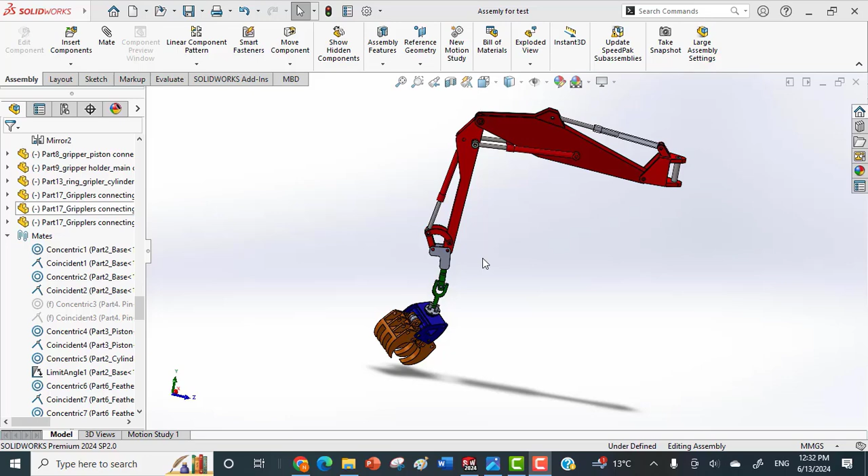Hello everyone. In this video, I'm going to talk about the crane or log lifting, timber log lift or timber crane. So I have designed this crane here, and I thought maybe it is a good idea to optimize the design, the crane that I already have designed, but we can just optimize that or improve its functionality or efficiency.

So you can see here I have designed a new gripper, because in most cases I have seen that all of these cranes are equipped with a gripper that has two couples of piston and cylinder. Let me show you here.

So these are, for example, the typical cranes. This one is mounted on a trailer. However, this one here is mounted on a self-propelled machine, a hydrostatic machine, self-propelled. So you can see here it is a very large crane, has a gripper.

In so many cases I've seen that they are using just two pistons and cylinders to make these jaws to be opened and closed.

And here you can see the schematic figure of this crane. This is the trailer, then the crane, piston and cylinder, and here is the telescopic piston and cylinder. So this is the gripper, and this system is used for making this gripper rotate around this axis.

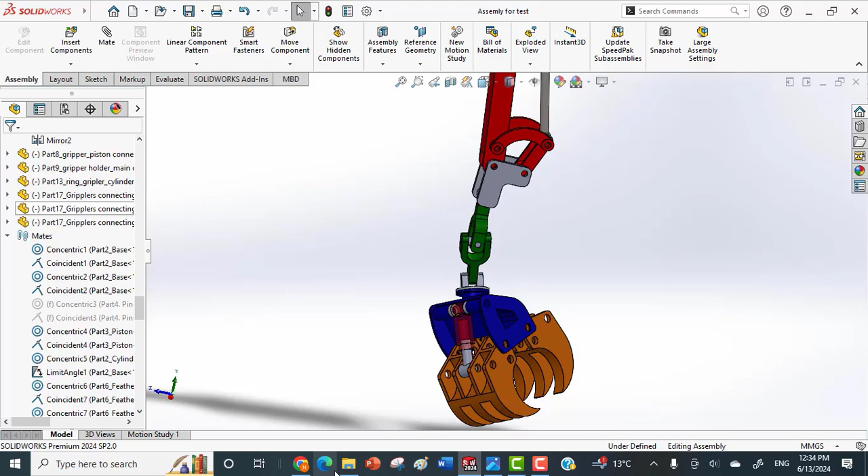Let me show the universal joint here. This is the universal joint, and this one is for what? For the gripper. All of the components of the gripper, you can see here.

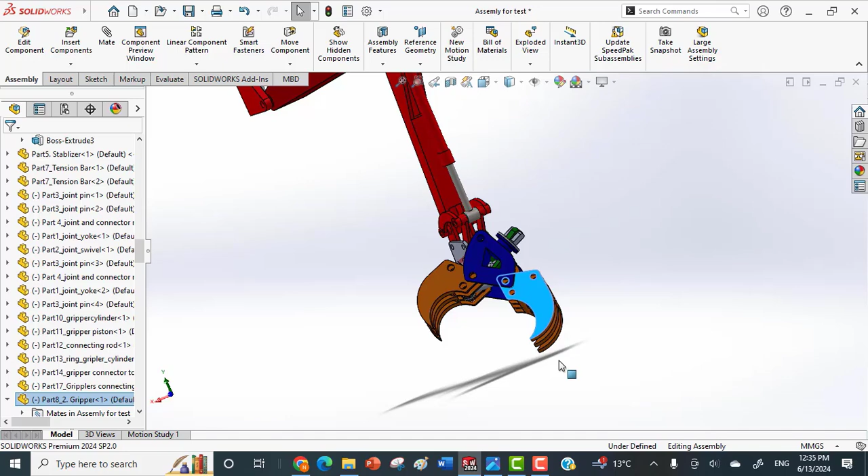But in this video, I'm not going to talk about each of these components or draw them from scratch, but I'm going to show you how I assemble these components together, because assembling all of these moving parts, for example here and here, even here, all of these jaws - let me first make this one come down. Let me fix this one here, for example. You can see here the jaws opening and closing.

But the problem here in assembly is that these components are not so easy like that, because we have to do some prevention to avoid overlapping. And I'm going to talk about this technique named angle and linear mate technique that I'm going to use in order to avoid this overlapping.

Let me show. I have done two linear or distance and angular limits here. You see this distance - what is this distance? Distance means the distance that the piston goes inside the cylinder, and angular means this angle between this one and this one, the chassis and the jaw, the right jaw.

So if I am going to suppress them, look at what happens here. You see what happens? They overlap each other.

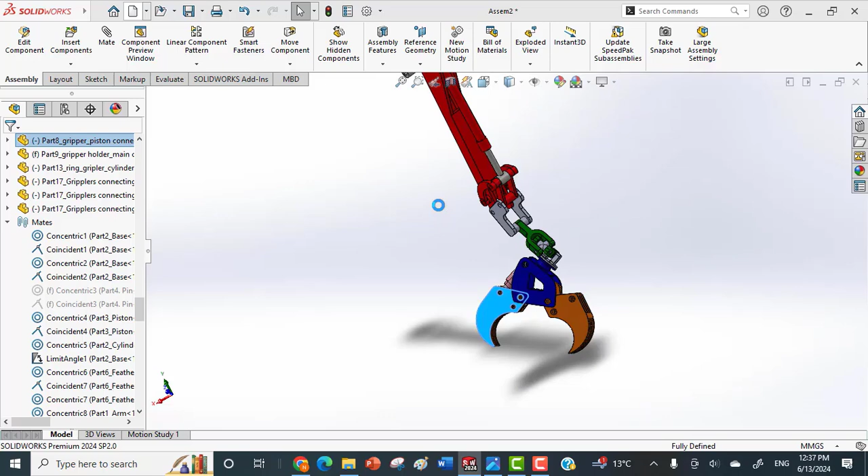So let me bring a new one, and a new assembly here. In this stage, I will have to bring all of these parts together - not all of them, but the base and the feather here. Where is the feather? This is the feather and the arm. I brought all of them one by one.

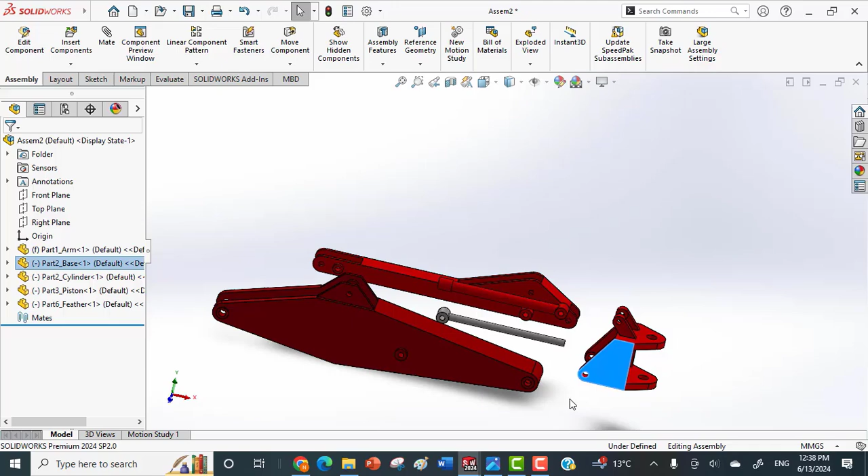Let me do this one first. Made this one with the feather with the base, and here with here. And secondly, I have to take this one here with here, and let me do this.

And here, making coincident. At the same time, making the cylinder and the piston concentric. So what is next? The next one, making this one concentric with here, and that's it.

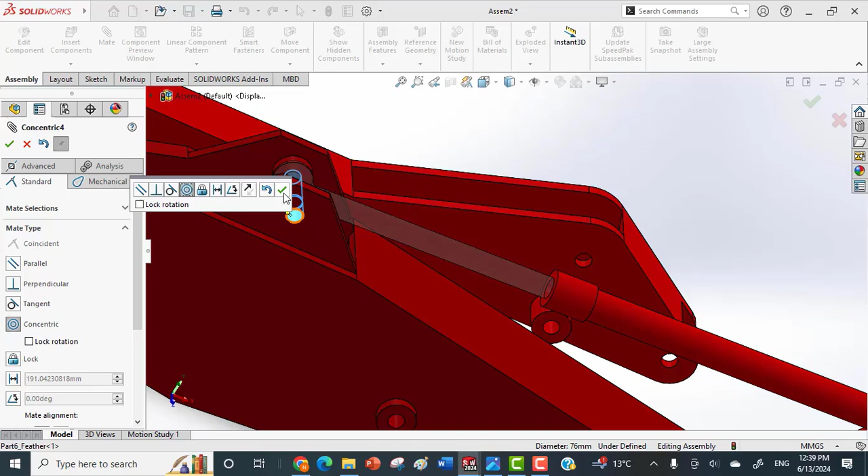So let me show what is going on here. Let me first fix this one. Okay, I fixed it. You see, but there is a problem: the feather is rotating, the angular rotation of the feather is 360 degrees. We don't need that. We just need something like this between this degree and this degree, because you can see we have considered this space here.

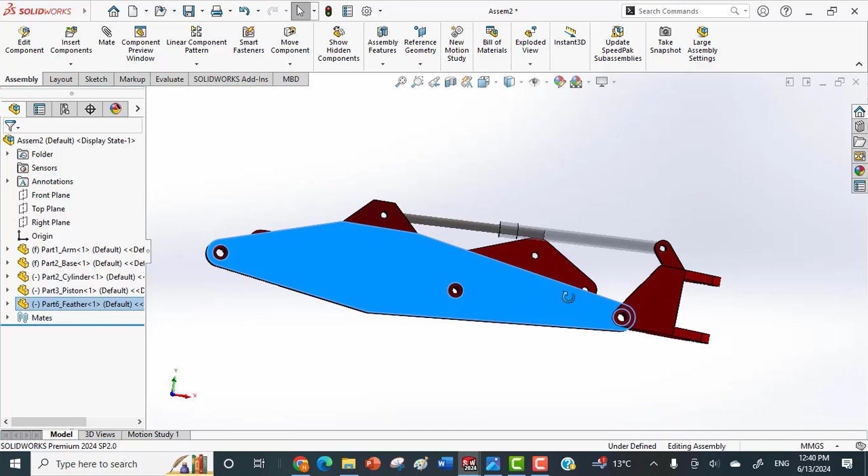We don't want this piston to go out of the cylinder here. So for mating and for limiting the angular rotation, we have to use this technique of limiting. It is very easy, or maybe you already know that, but I wanted to use that and show how it works.

This one, mating with here. Okay, so you see that... let me, okay.

Angular. Okay, flip, let me flip it. Okay, not flipping like this. Okay, if I'm going to make that, I have, okay.

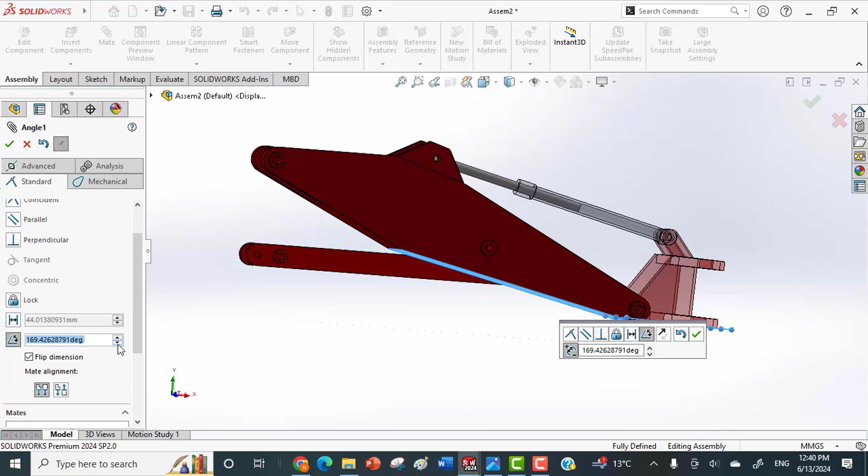So I can say if the minimum is 175, the maximum is 175, what will be my minimum? Let's do that 60.

60 is a lot. So let's do that 120. Okay, even 120 is a lot, because we don't want to make this one just vertical. It is close to vertical.

We can say that 100 is okay. 120, 140. Okay. Yes, the distance between 140 and...

175 will be even this one. We can make this one 145.

135. Okay, 135 is minimum. So I'm going to change standard to advanced. Minimum will be this one, and the maximum will be 175.

Okay, minimum 135 and maximum 175. Okay, here.

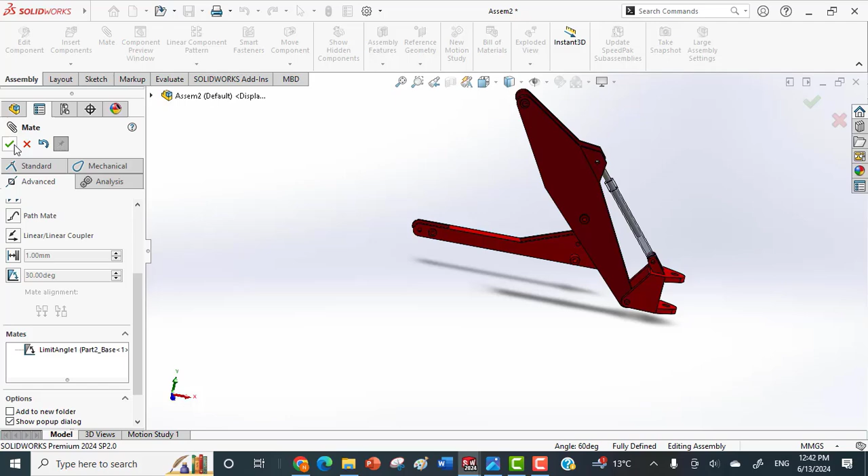So you can see here exactly. Okay, it's working. Let's bring the next stuff here.

The next component is the feather, the arm. How I'm going to do that? I'm going to do this one.

I think it's not float. Yeah, it should be float right now. Okay, let me bring it here.

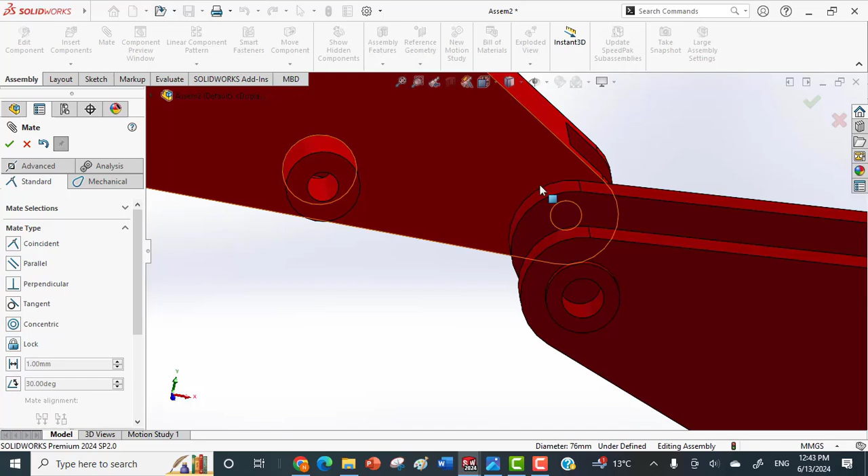Okay, okay, and okay, and this one, okay, and this one should be coincident with this face. Okay, that's it.

So let me bring the other components. Again, we are going to use the same piston and cylinder.

Piston and cylinder here. Okay, okay.

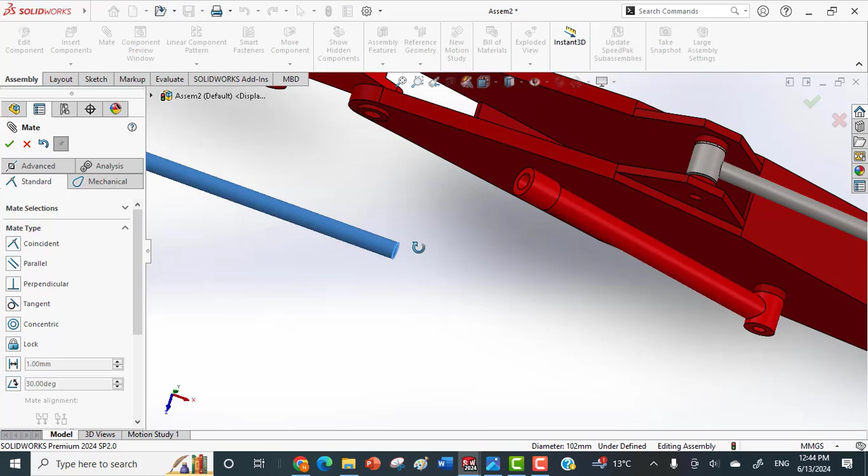This piston should be concentric with this cylinder as well. Okay, so it should be at the same time. It should be concentric with here. Okay.

Not here. Oh, it's not correct. It should be. Let me delete that one. Yes.

Sorry, here. So I have to make coincident and concentric with this one.

Okay. Okay. That's it. Perfect.

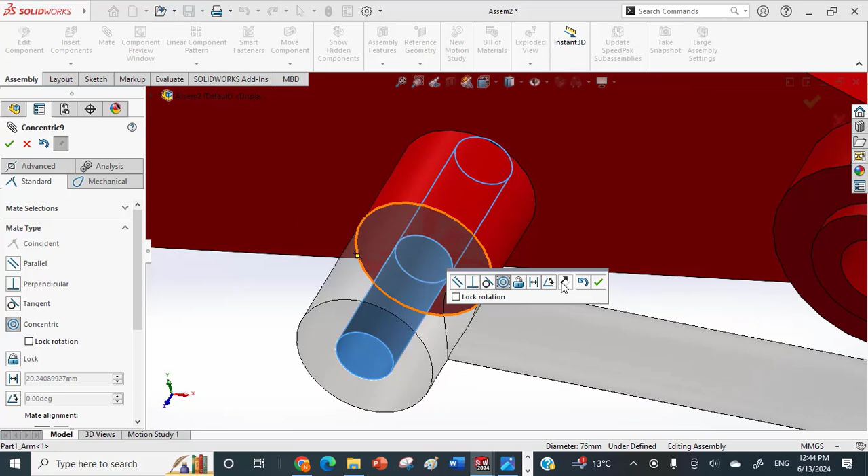So let me show what is going on here. Okay, let me bring the other side, a couple of piston and cylinder here.

So again, here and here, you can see that I'm going to bring them inside the assembly.

Section. Okay. Here, let me bring here and here.

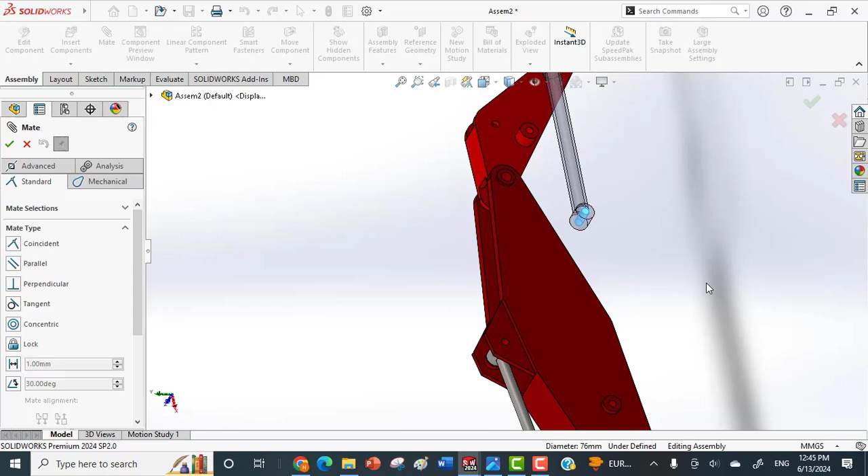So here, I have to take this one mated with the feather here. Okay.

And here with here. Yes, I think it will work. Hopefully. Yes. Okay.

Okay. The next one is to mate piston and cylinder. Okay, and mating...

What's going on here? Okay. Okay, mating this piston and cylinder here.

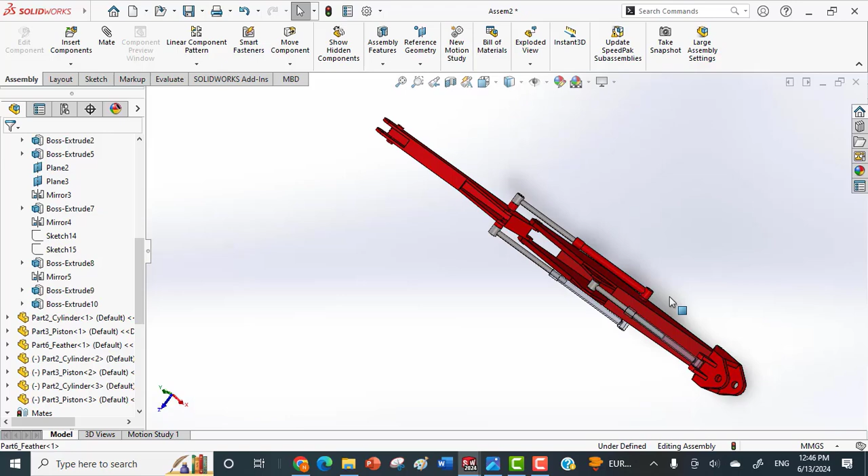Okay, and okay. So again, you can see here that we have overlapping between this component, the feather and the arm.

So again, here we have to do the same mating process here.

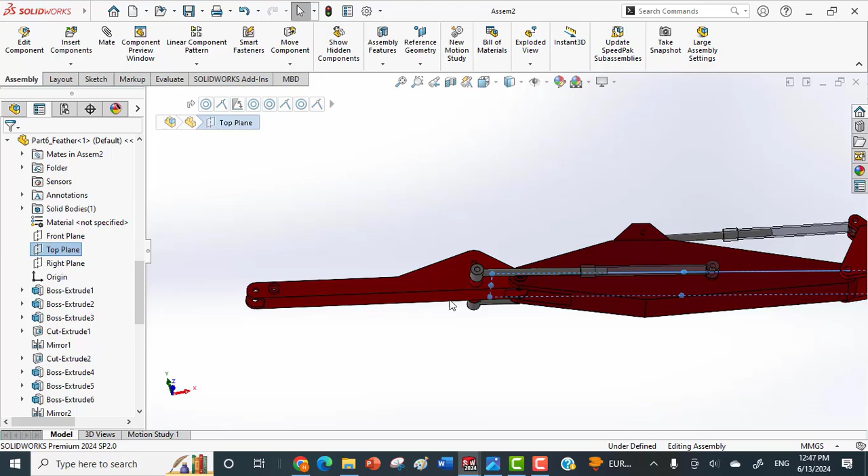Okay, the same process here. Let me find the component - not the front, not the right, the top plane - mating with here.

Okay, so if it is 2 degrees, how am I going to increase it? No, I have to increase that until, for example, 90.

90 is okay. Yes, I think 90 is okay. Even we can do that, 95.

Yes, 95. So you saw that 95 is the maximum and the minimum was 2, or 3, or 5. Let me make it... or 3.

Okay, 3. I changed the standard to advanced. Okay, so here, okay, so you can see here that it goes here and here.

Even let me fix this one, okay, to show you that perfectly. Okay, that's it.

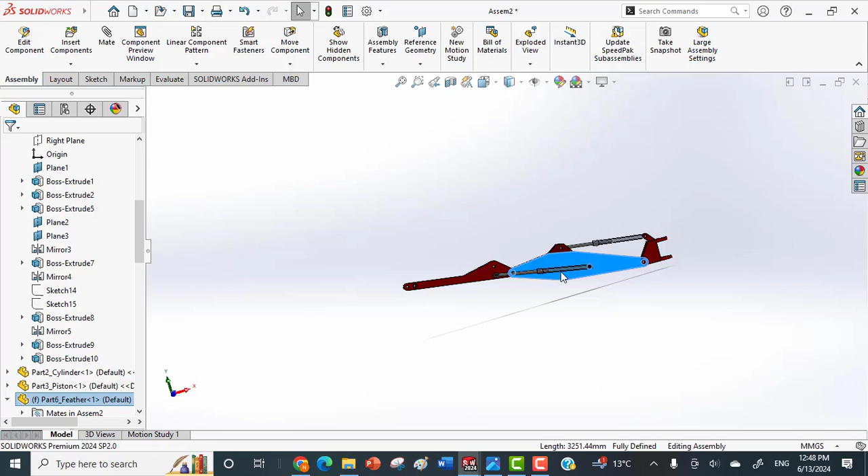Again, floating this one, and let me bring the next component here. The next component should be again the same piston and cylinder to connect...

To connect the arm to the joint, the universal joint here. Where is the cylinder here? I didn't bring that here.

Again here, cylinder. I'm going to bring this one as well, and the stabilizer, and this one.

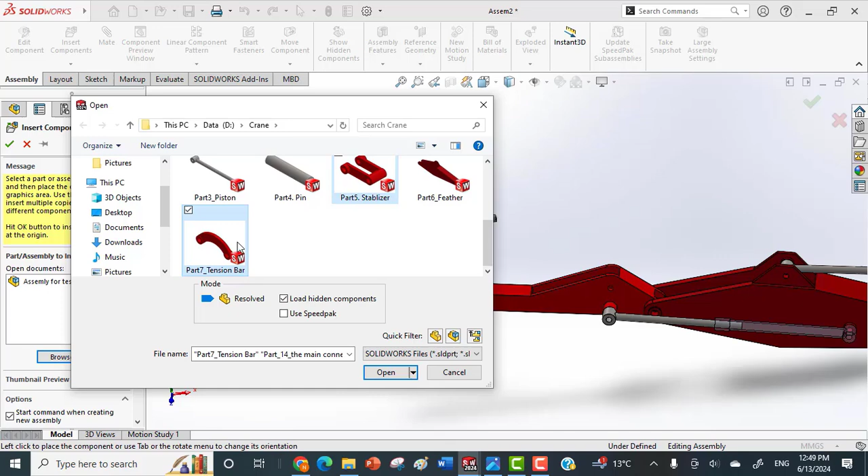Okay, the tension bar. Okay, and okay, okay, and okay. So, and okay. So let's do this one.

Okay. Okay, let me bring it up here.

Okay, this one, mating piston and cylinder again. Okay. Okay.

And this one should go here. Mating again this section with the surface.

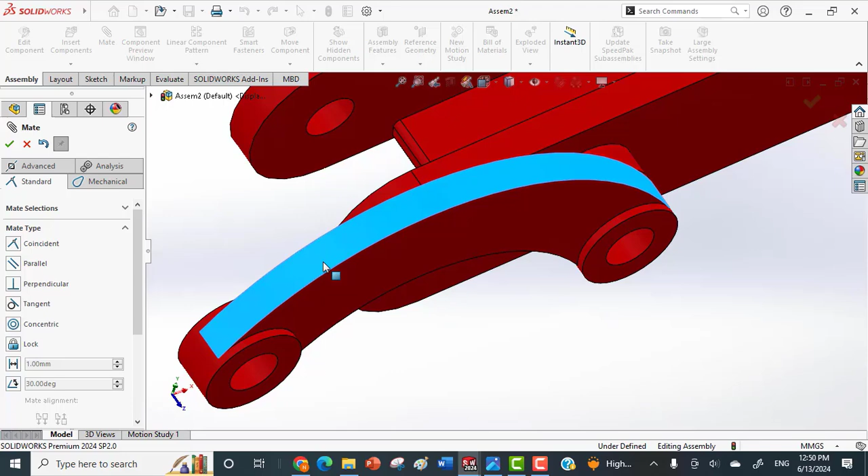Okay. Okay, and... for now, okay.

So here, let me do what? To fix this one firstly.

Okay, already fixed that. Okay, and okay. So here, I have to bring...

This one here. Okay, so here should go - I think, if I'm not wrong, it should be, yes - because it's going to make...

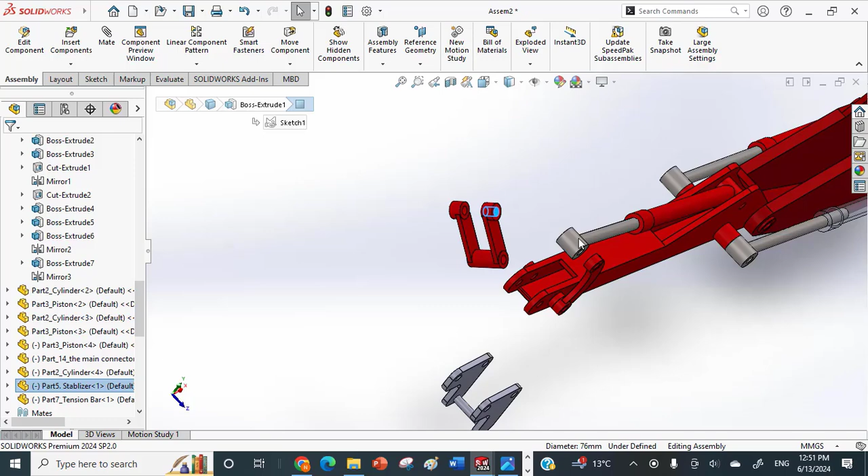That one rotate. Yeah, it should go here. Mating this one with this one, and this one.

And where is that? Yes, here, this one with here. Okay.

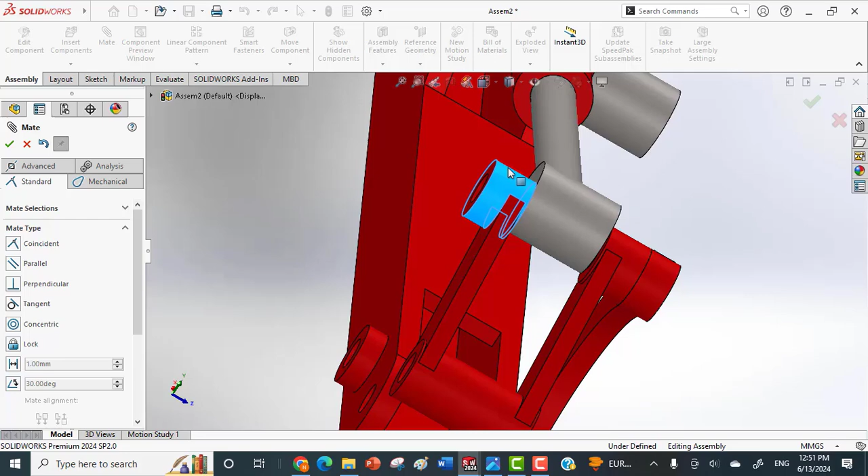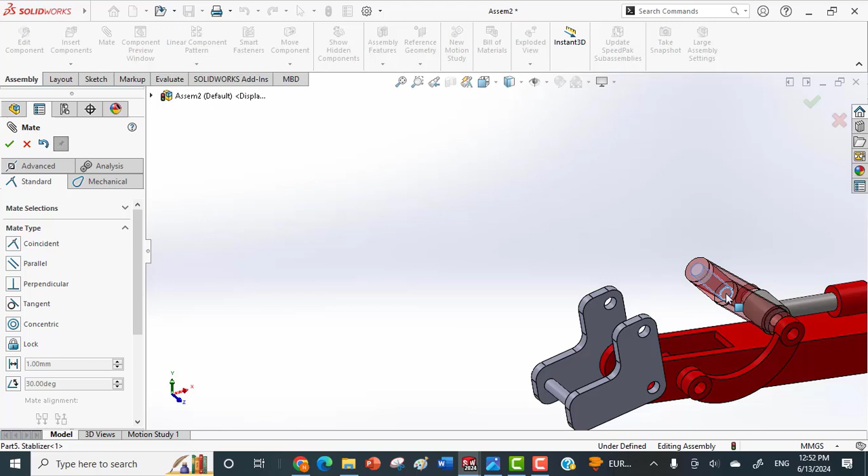And again this one here, and this one coincident with here. Okay, let me bring this one as well. Here, what am I supposed to do? Yes, this one goes firstly here to here, and this face with this face, obviously. So the next process should be mating this one with here. Okay, so yes, that's it.

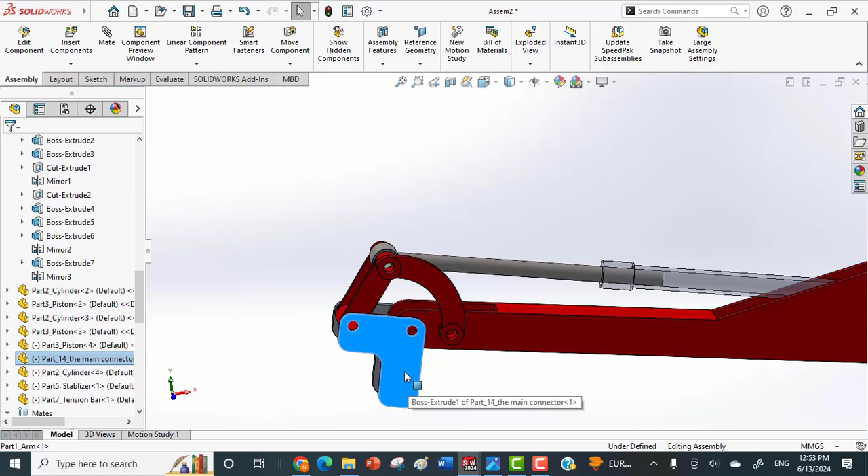So what is going on here? You can see again we have overlapping here. What am I supposed to do? I have to do again the same process of limiting the angular rotation here. So if I'm taking this one, let me firstly show what is going on inside here. Let me make the cylinder transparent, so you can see how the piston moves inside that cylinder. If it goes, for example, 90 degrees between this one and this one, it is enough.

And even if it comes back close here, even a little down, this will be okay. Because we still have space here inside the cylinder, between the head of the piston and the inside end of the cylinder. But let me do it like this - you see, it's not overlapping because there is a space here. No, it is obviously all overlapping, so I don't have to make this one here. I have to, at maximum, make it here.

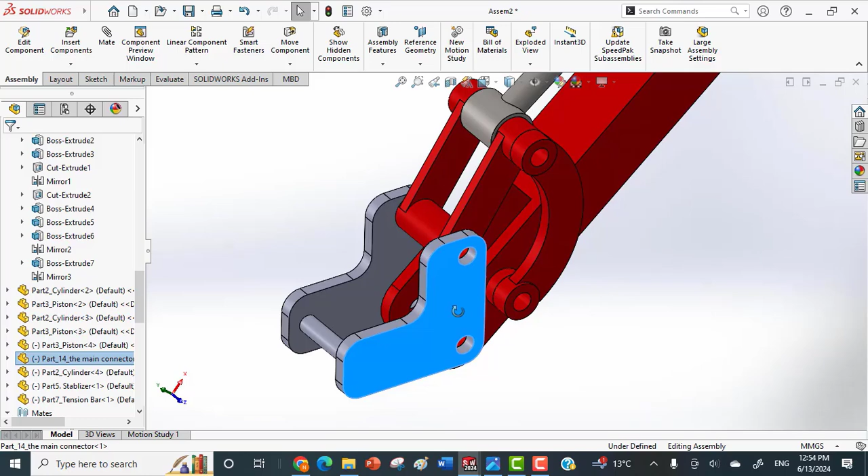So let me bring the other stuff as well, the left tension bar, not stabilizer, the tension bar here. Okay, we have to make this one to... okay, and okay.

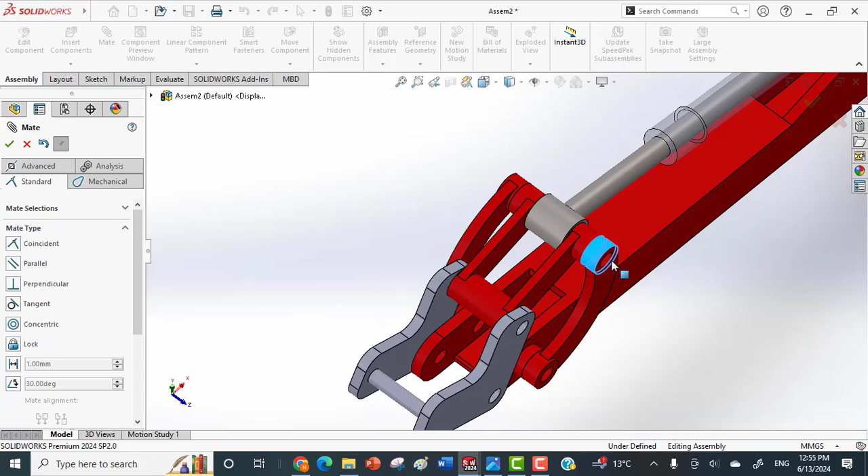Yes, I have to bring it until here and until here. Okay, this component here is okay. So this component, I have to bring it here, not the right, not the left, not the front, the top, mating with this surface here.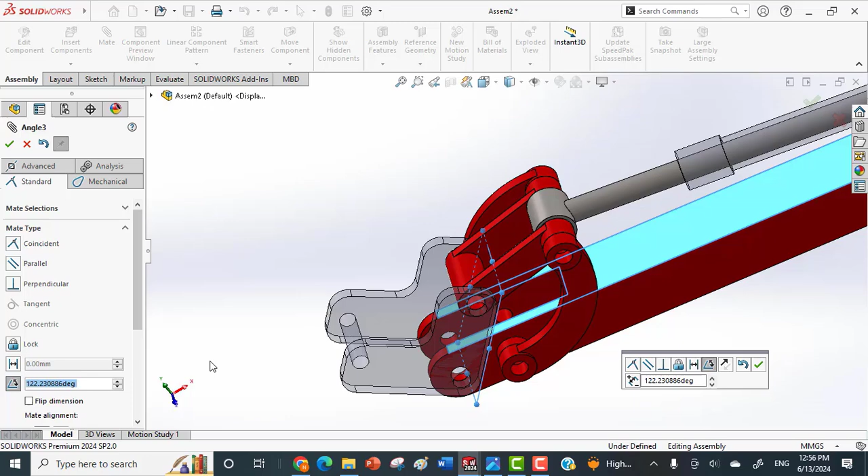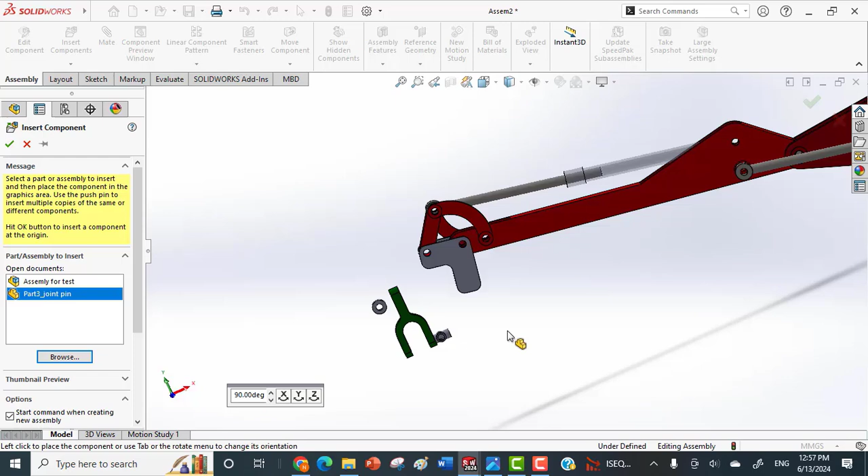So let me bring the universal joint component as well. Let me go inside this file, the yoke, the swivel, and pin, not joint - pin 2 and 3 and 4. Let me bring the second yoke and the other rings as well. Where is the second yoke? The same jaw will be the second yoke. Here, and again the pin. Okay, all of them again, 1 and 2 and 3. Okay, here.

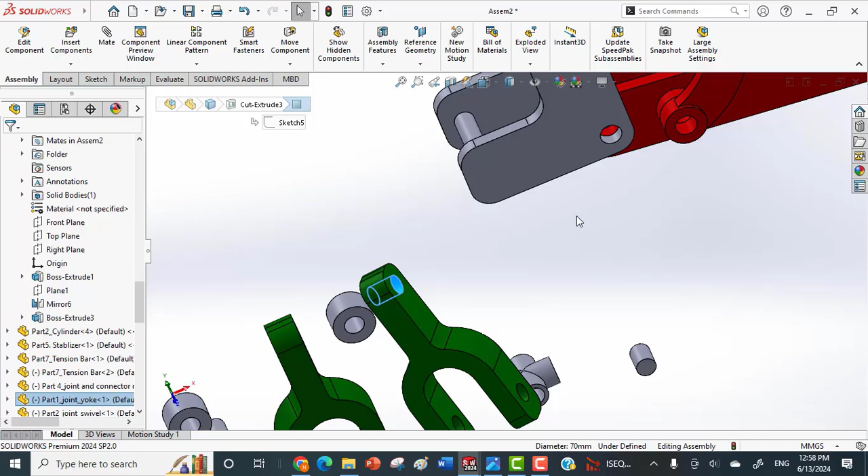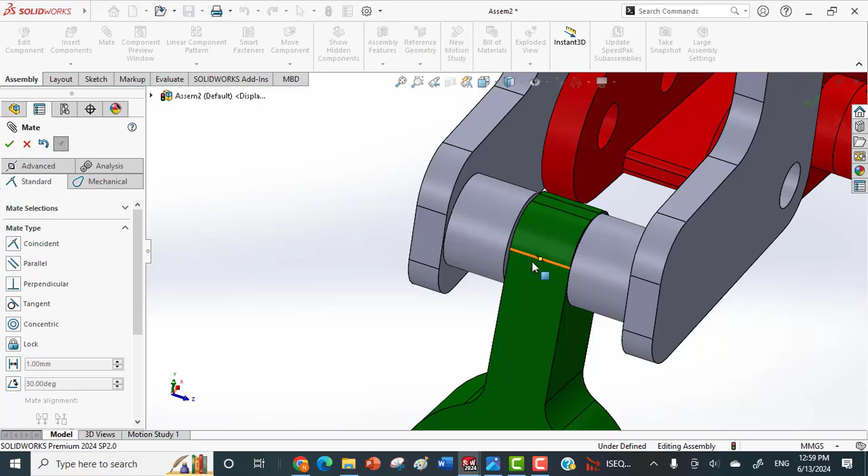This one should be mated with here. Okay, let me bring this one. Let me mate this one here, and make it coincident with this surface. And this one coincident with this ring as well. So the next, again the same ring - where is the same ring? This ring with here. Okay, and make coincident with this surface. Perfect, okay, so you can see here it's working like this.

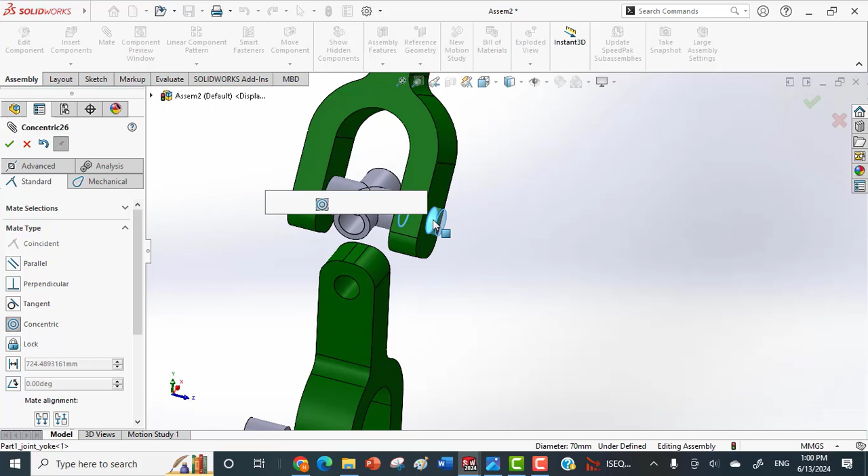Okay, let me bring this one with here, and this surface with here, and let me bring this one here, and make that coincident with the surface. Perfect. Okay, the next component, the next jaw should go - this one should be concentric with here, and this surface coincident with this surface. Okay, so again let me bring this one here and make coincident this surface. Perfect.

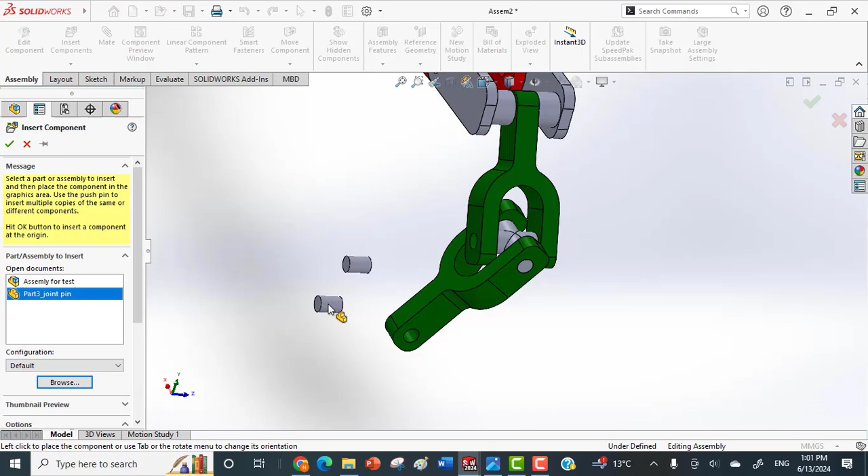Okay, so let me bring the other third and fourth pin here. The third one should - and again I have to bring that for the second time. Okay, so here let me mate this one with here. Okay, and here, that's it. And where is the last one? Okay, here you can see, here with here. Okay, okay, and okay.

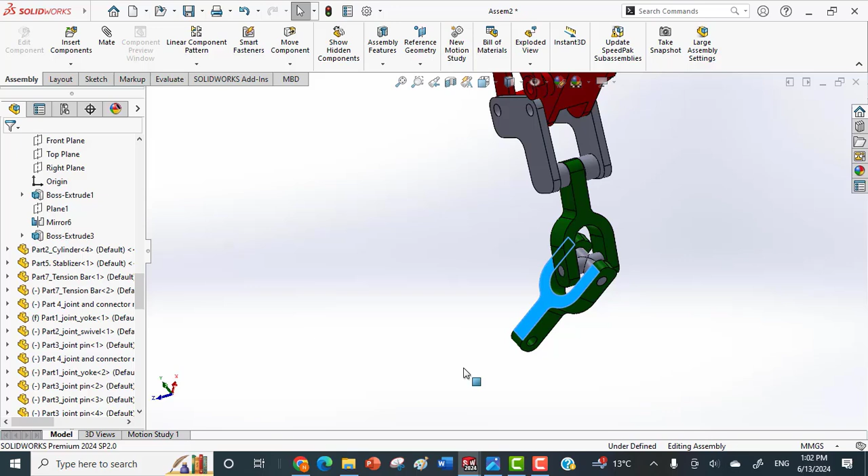Okay, let me show you how it works. Fix this one - you can see this one is working in this direction, and at the same time it can be rotated in this direction as well. You see? Because of that we call it a universal joint.

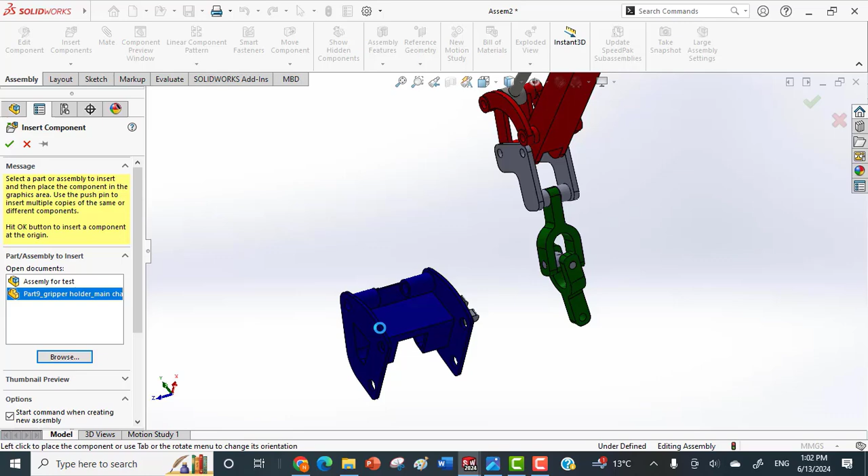So what is next? The next is the component of the gripper. Let me bring firstly the chassis and this one, the connector 1 and 2. Okay, make mating here. Okay, and make coincident this face with this face. That's it.

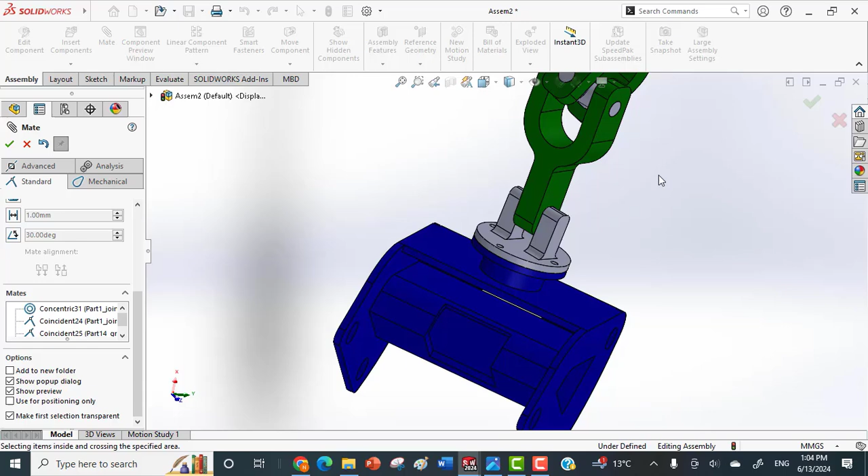Okay, so making this one and this one here. And what I have done here - this one with this surface. Perfect. Okay, so you can see that it should be rotating around this section, because of course here we need another mechanism to make this one rotate around here, but it will take a lot of time, so I avoided that. Maybe in the next videos I will design a mechanism to make this rotate around here.

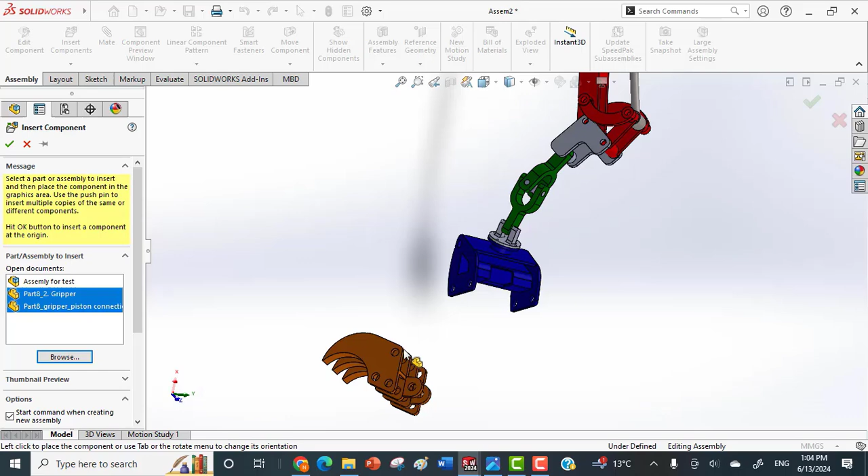See, again I'm showing you how it rotates. For example, let me fix this one. You see, this one is rotating, the chassis is rotating. Okay, let's make the component float again. Fair enough, let's go to the next components, right and left jaws, or yoke.

So here, okay, this one should be, okay, which one? Okay, this one, yeah, this one should be here. We have to fix this one here. Okay, mating. Okay, here, and go. Okay, that's it. Okay, and okay, perfect, and perfect. Okay, and okay. And here, with here, we have to make that one.

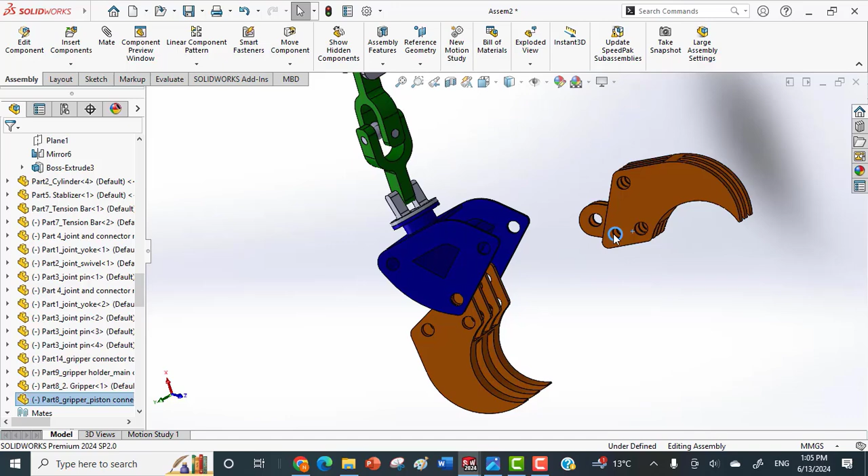Okay, let's do this one as well. Okay, that's it. I didn't make mate here. Okay, perfect. Here and this face. Okay, and okay. And so, okay.

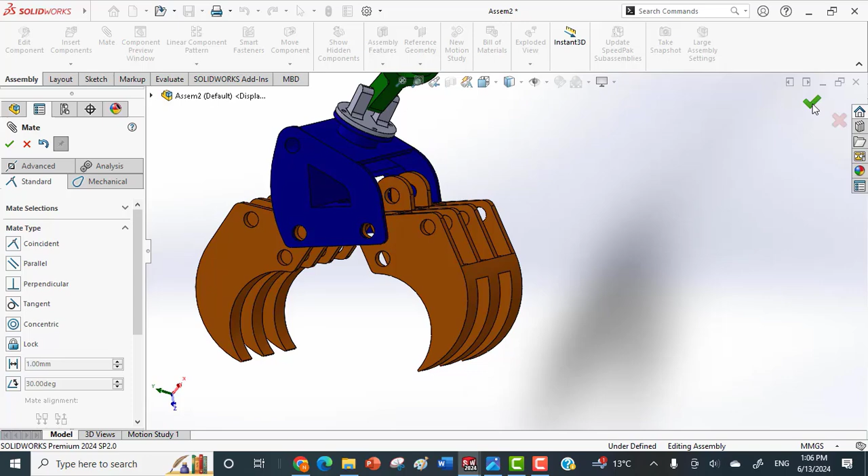And let me bring the piston and cylinder here. Not here, here. Okay, where is the piston and cylinder? The piston and cylinder is inside the same folder, piston and cylinder. And let me bring the rod as well, these as well, the rings as well. 1, 2, 3, 4, and 5. Okay, and 6. Okay, the piston should go here.

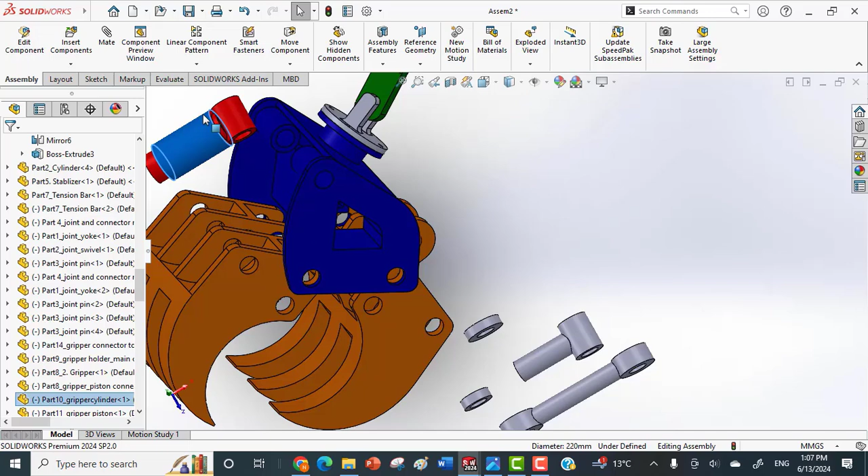Okay, coincident with here. Okay, let me bring, where is that? Okay, I don't have to make coincident because I have to put this ring here. I think this one should go, no, not this one. Where is the second? This is the, yeah, this is the little one. I think it should be, the smaller one should be here, hopefully. Okay, okay, so let me, okay, yeah, I think I am right.

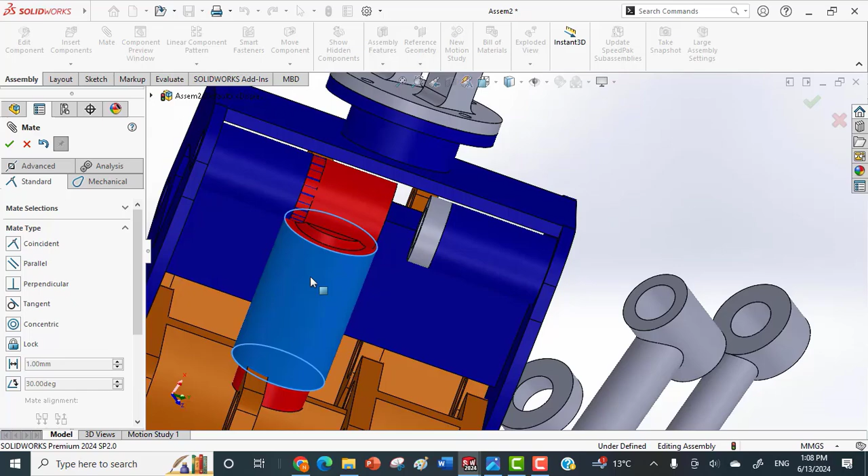And I have to make this one with here. Okay, and I have to make the cylinder with the same ring here. I have to bring the other ring. This one goes here, here. Okay, go, go, go, go, go, go, go. Okay.

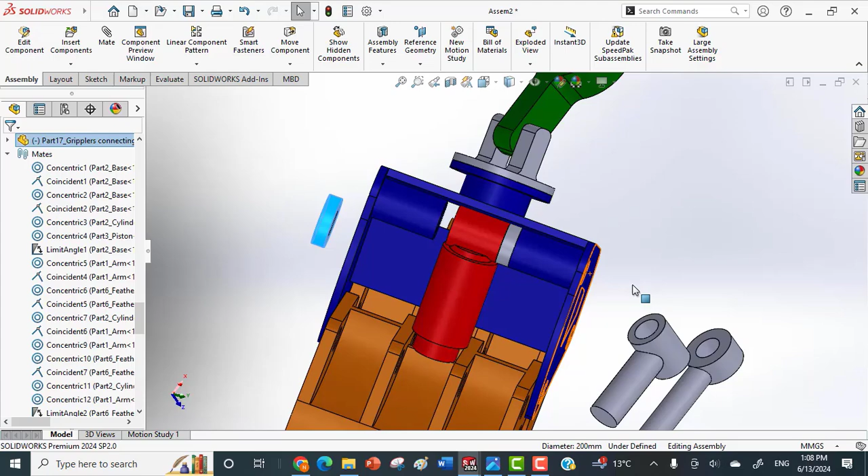Yeah, not this one, obviously. So I have to delete that one. Okay, it should go, not this one, the other one. Where is the other one? So I don't have the other one here. Let me bring that again. The second one, the ring connecting a cylinder to the chassis.

Gripper, this one or this one. Gripper connecting rod. Yeah, this one. I need 4 rod. I need 4 of them. I have to bring it again. One.

Okay. So here again, mate with this one here. Okay. And the surface with here. Okay, that's it. Yes. So the piston will not hopefully move around there. Okay, and so,

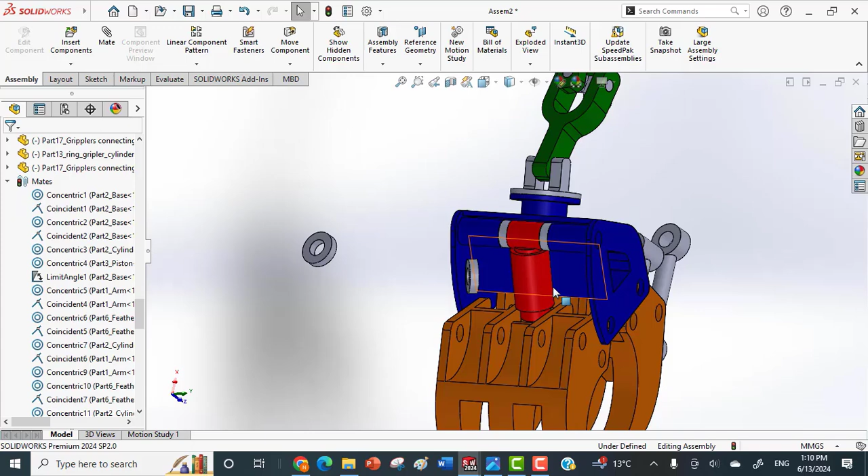Okay, here do I need, let me, okay, fix it. Okay, I need to bring the piston here and mate piston with cylinder here. You see, the piston and cylinder are simple here. In reality, the piston and cylinder are much more complicated than this one. Okay, let me bring this one with this one here. Okay.

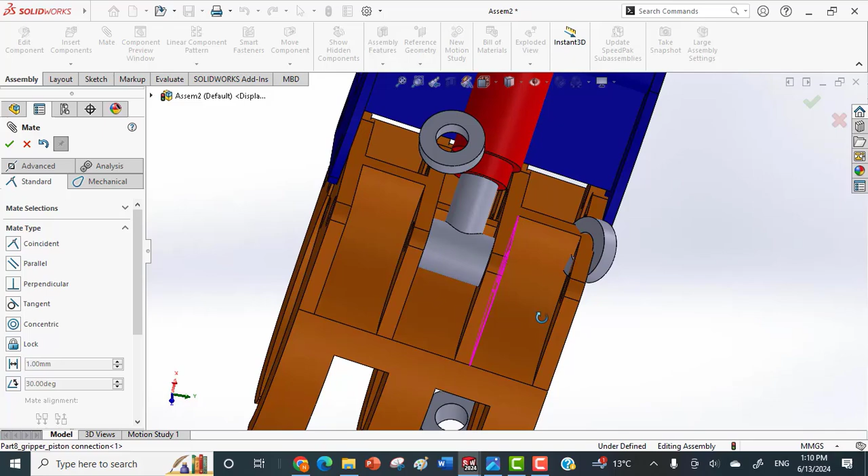Okay, let me show what is going on here. How can I show that? I have to make transparent the, I have made transparent the wrong one. Okay, I have to make piston cylinder transparent. What is wrong here? Okay, let me, okay, where is that, reveal that? Okay, transparent. What is going on here? I don't understand.

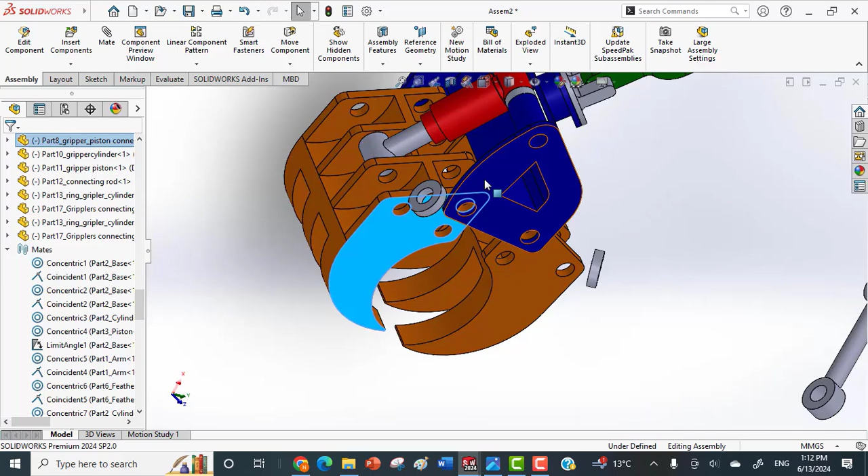Gripper and cylinder should be transparent. Maybe there is a problem with the... Okay. So what is the problem here? Let me fix this one firstly. Fix, okay. Okay, and you see here, it's overlapping. The problem is that these components are overlapping, passing through each other. So we have to make the other mating process here.

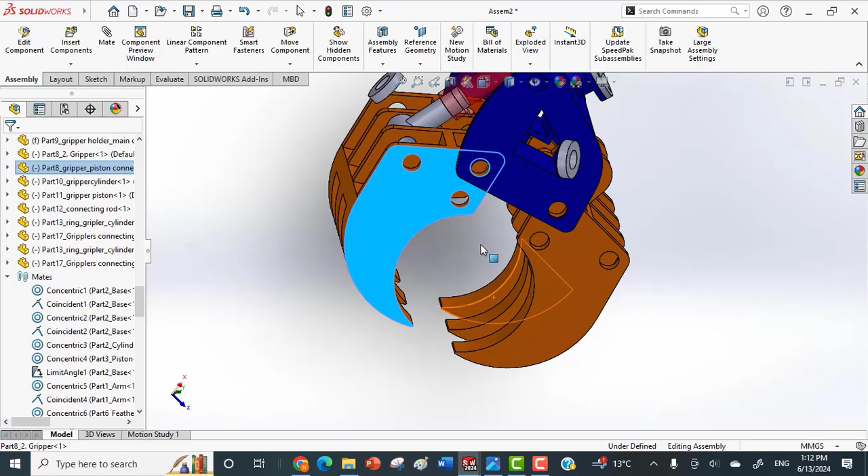Okay, so I made that cylinder finally transparent here. So let me connect the rod as well. Firstly, I have to connect or make a mate between the rod and, well, obviously firstly I have to make these rings to be mated with here.

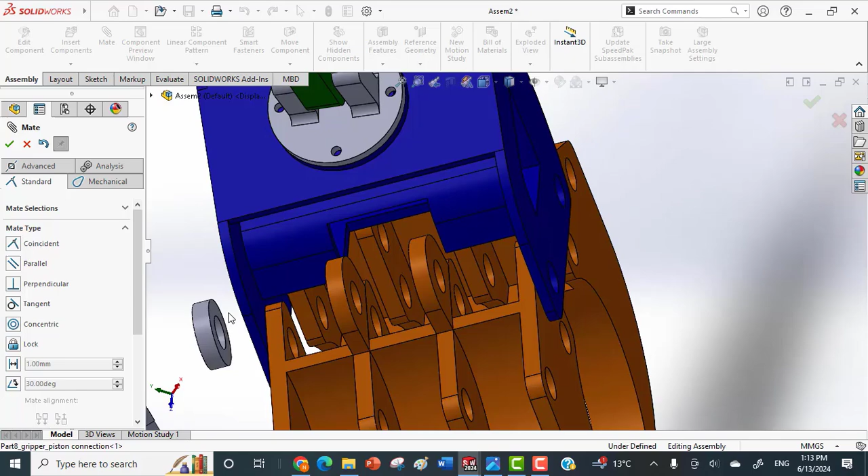Okay, so perfect. And so I'm going to make coincident that ring with this surface, and the next one here I have to make concentric with here and coincident with here as well. Okay, and okay, so here with here. Okay, so this surface make coincident here.

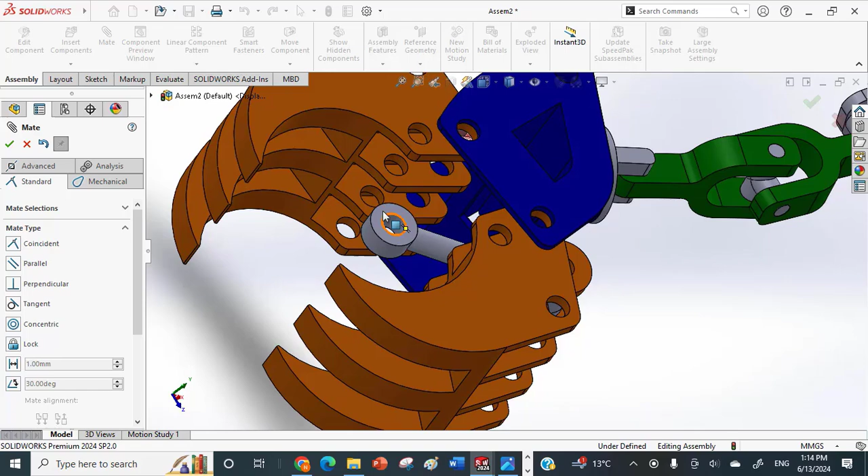Okay, so I have to connect this one with one here. Yes. Okay, for here I have to do what? I have to bring the other. I don't have them here, so I have to go back and retrieve, bring them here. Again, where is that gripper connecting rod? One and two.

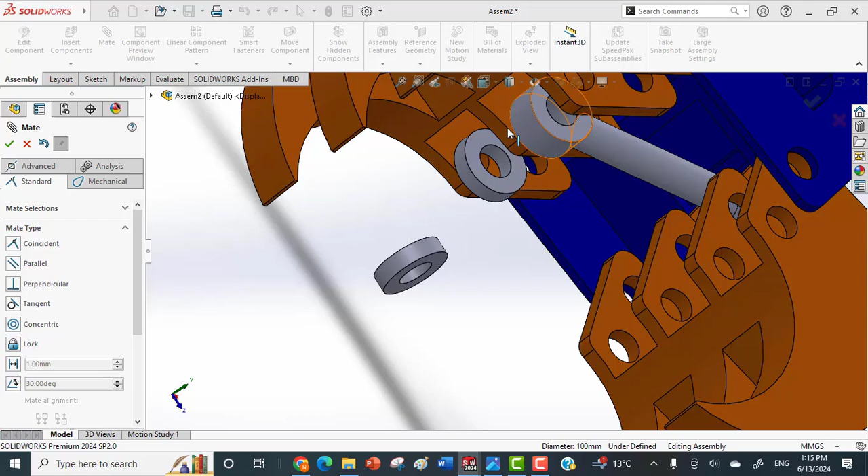Okay, here with this surface, that's good. I didn't make coincident with here. Perfect. Okay, let me bring this one here. Okay, and this one, or maybe this one. I don't know, this one here. Firstly, here.

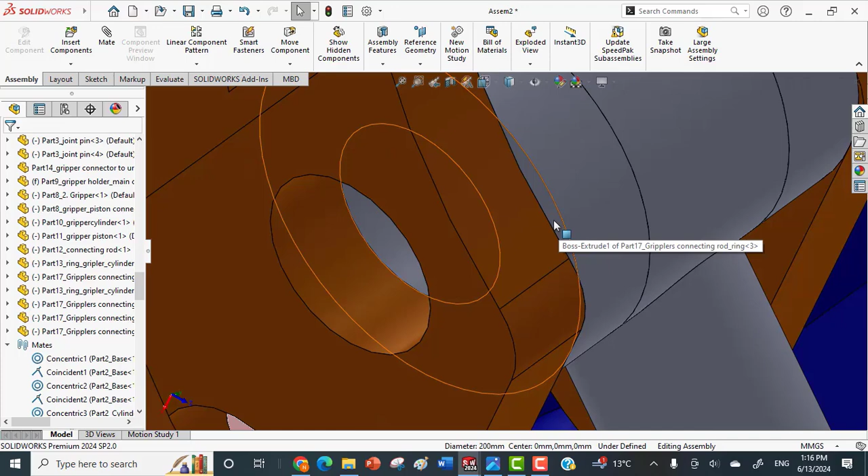And here. No, here. This surface made with this surface. Okay, perfect. So what is going on here? Let me show you. You can see again they are passing each other, which is abnormal. It's not normal.

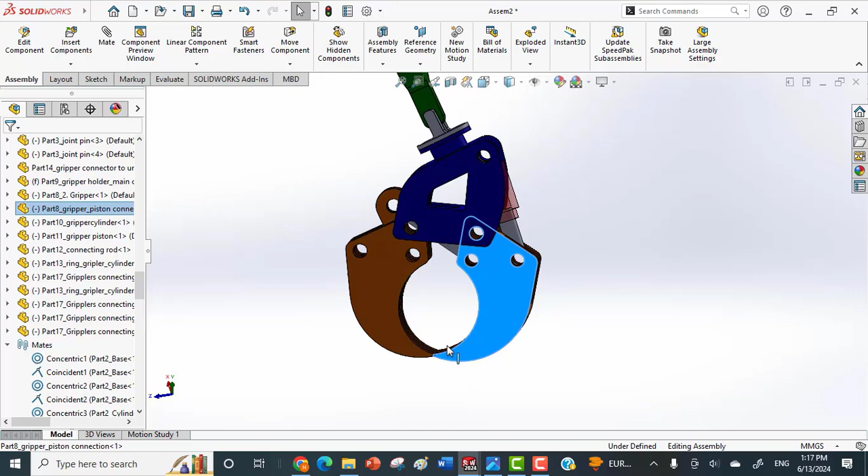So what we are going to do this time, I'm not going to make an angular limit. This time I have to make a distance limit here. Distance limit, what is the distance? The distance between inside the cylinder, the distance that this piston goes inside the cylinder.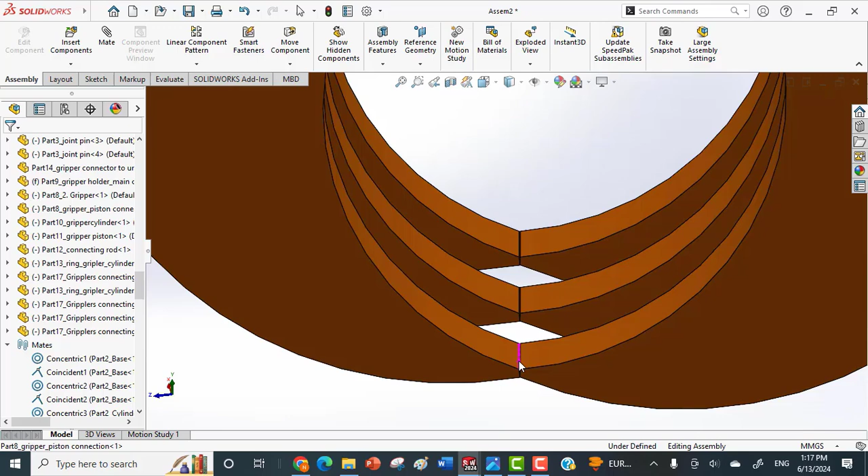Okay, let me firstly make them touch each other. Please touch each other. Okay, it's a little tricky here. Hopefully it's good. Let me see from the top if they are touching or not. Yeah, they are passing each other a little. Yeah, there is still space between them. That's okay.

And let me make this one fixed. It's already fixed. So when they are touching each other, we have to do this. So here the face, and I have to make the face of the piston. For example, here, this edge. So what is the distance? The distance is 511 and point blah blah blah. So I am going to copy that.

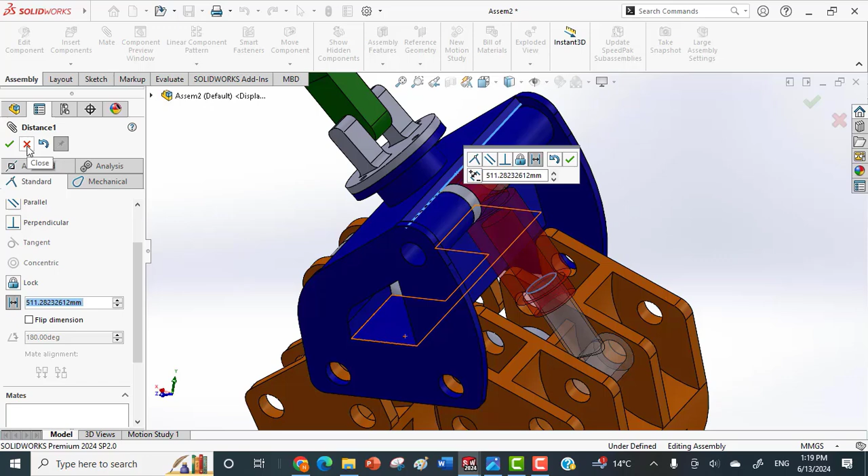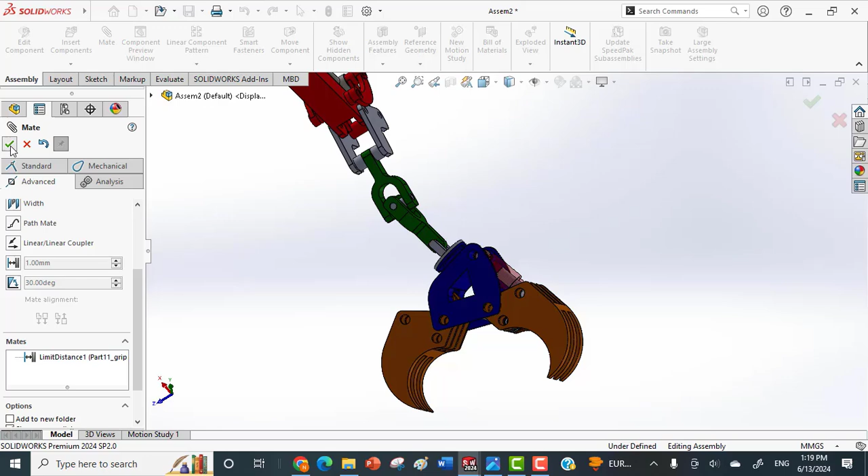Copy. Okay, I just copied that. What will be my, you can see here. Okay, so here I'm going to make the same process here, the same edge. Okay, is that enough? Yeah, it's okay because they are opened very widely. So let's change standard to advanced. So if this is the minimum, I have to paste here the maximum.

So you see here the maximum and minimum. Okay, but what happened here? We still have again another overlapping here, here and here. So to avoid that again, we have to do the next mating here. This mating will be like the previous ones, similar to them, I mean the angular one. So this component, where is this component? The component is here. So not front, not right, the top.

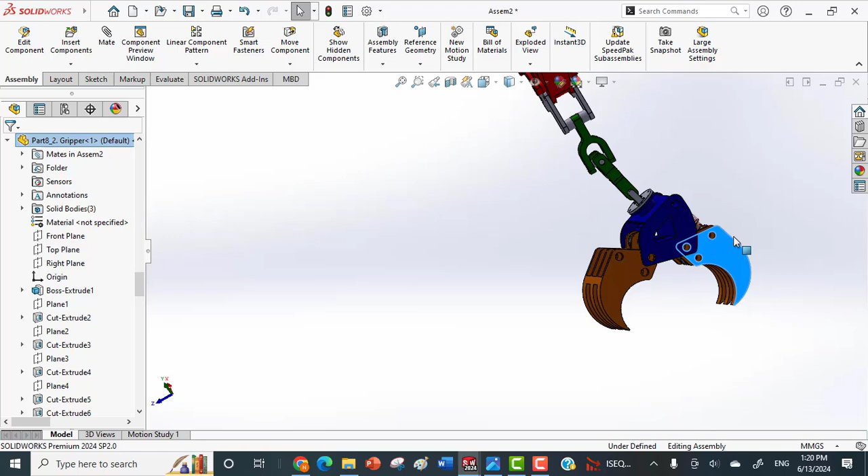Okay, mating that with here. Let me do this firstly to bring them together. Okay, the same process. Okay, find this one, the top, mate with here, with this face.

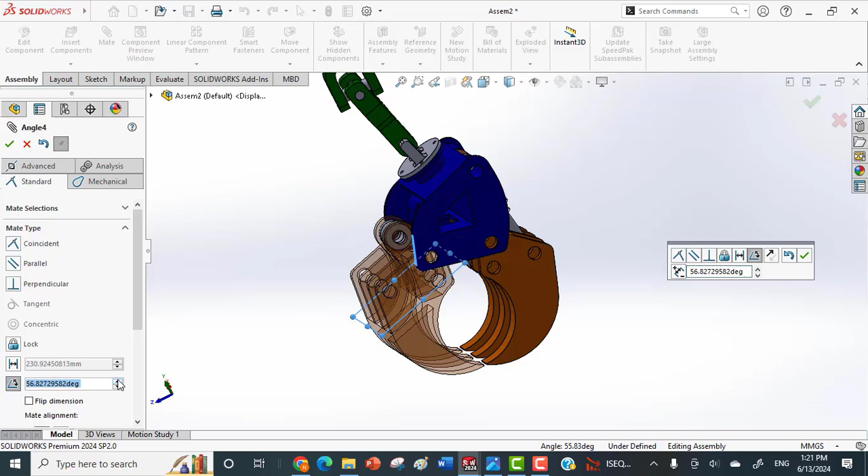Okay, the angular one. Okay, so let me copy this one. Copy. Okay. I am going to open that, open, go, open.

67, 70, 71, 2, 3, 4, 5, 6, 7, 8, 9, 80, 81, 82, 83, 84, 86, 90, 91, 92, 93, 94, 95, 96, 97, 98, 99, 100. 100 should be enough. Same, 101 or 100. Yeah, it should be 101. Okay, so this is going to be the maximum, and I already have copied the minimum. I have to paste that minimum. Okay, so here. Okay.

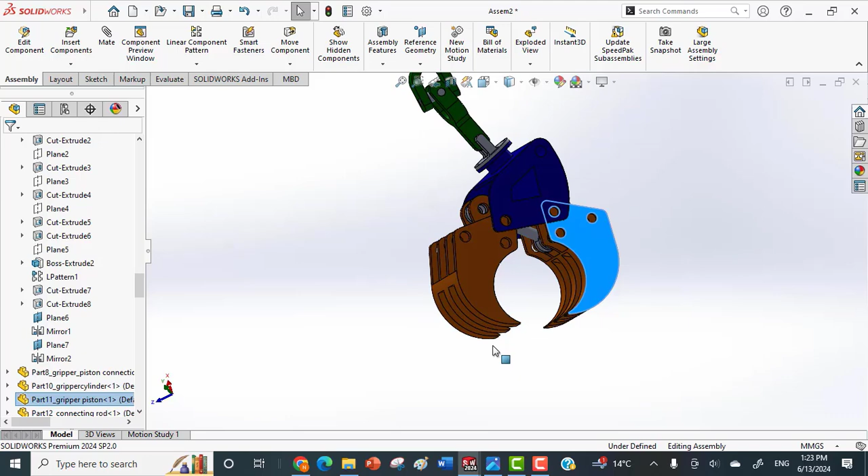And okay, yeah, you can see here it is working, and hopefully they are not going to pass each other. Okay, you see. So this time we have done that to make sure they are not going to pass each other. Okay, again, you can see here.

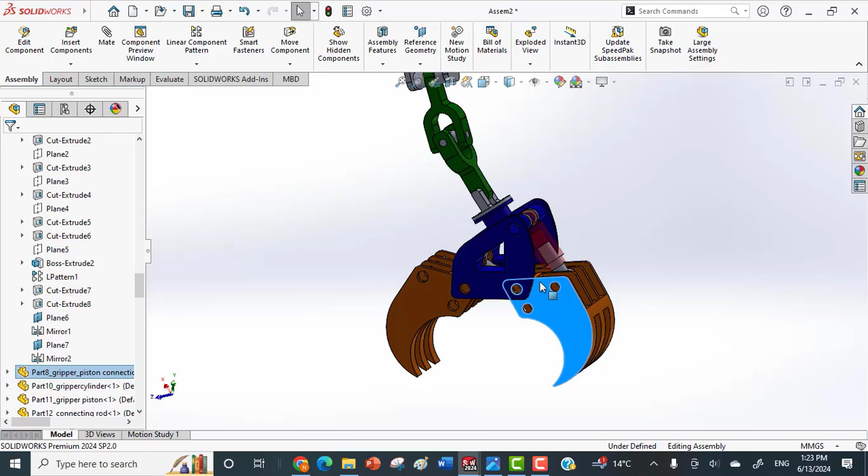Let me save them as well. Okay.

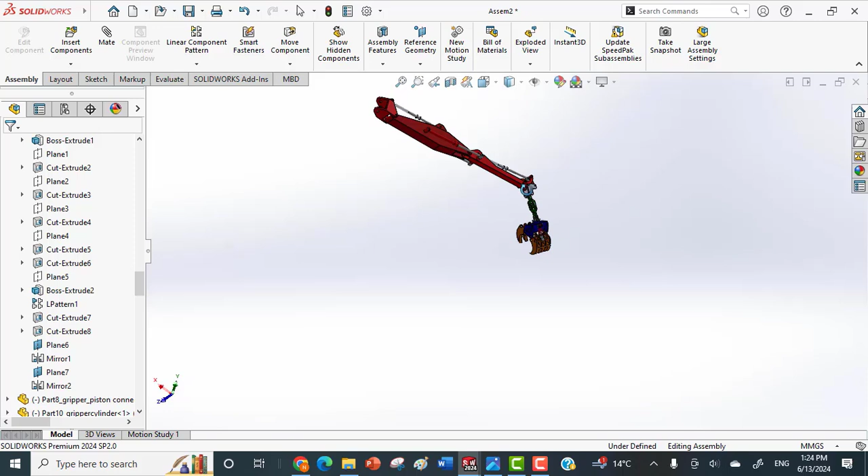So here, let me float that one. I'm going to float that. It will be rotating all the sections. Okay, from the beginning, you can see here all of these rotations. So you already saw all of these assembly mating techniques that I use to avoid the overlapping.

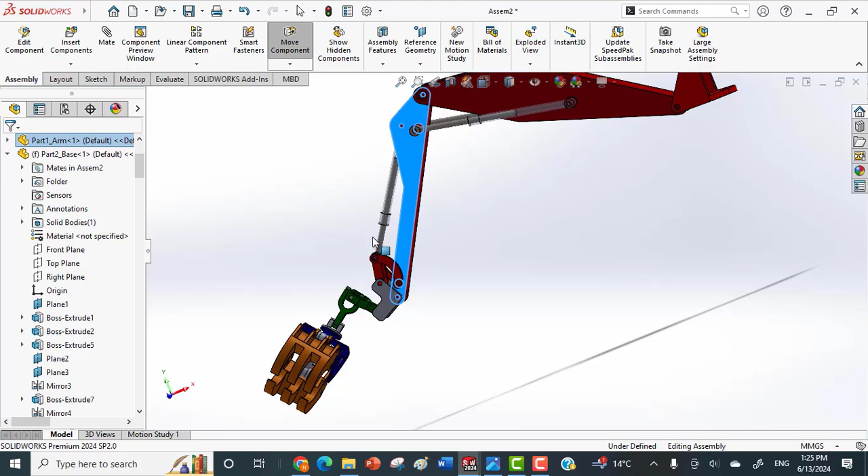Float. Okay, yeah, here you see here, and is this one, yeah, it's already free, not fixed, floating, floating, floating. Okay, and here you see this one opening and closing.

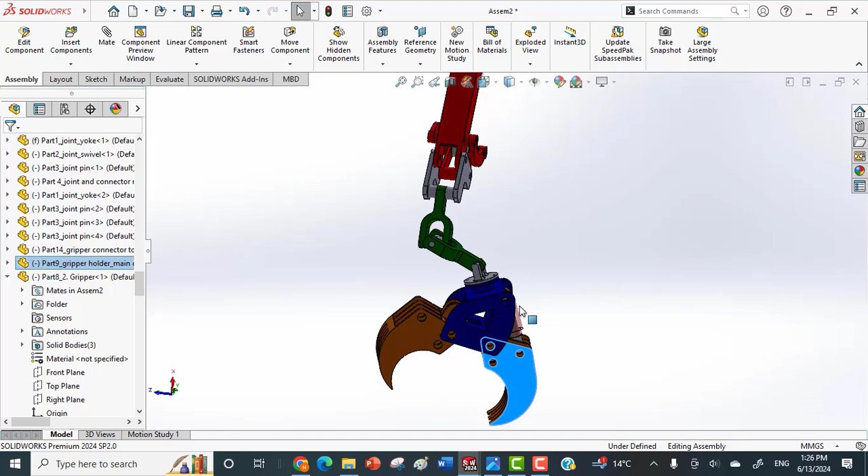So, and even this one, you see the universal joint is working. Let me fix this one, for example. If I fix this one, you can see it's working here and working like this in all directions. And fixing that, opening and closing at the same time.

Okay, that's it. In the next video I will show you how to design this one, how to design the gripper, because the gripper is here, and it is a little crucial. So because you see, we firstly have to make them touch, and we have to make two types of limit here.

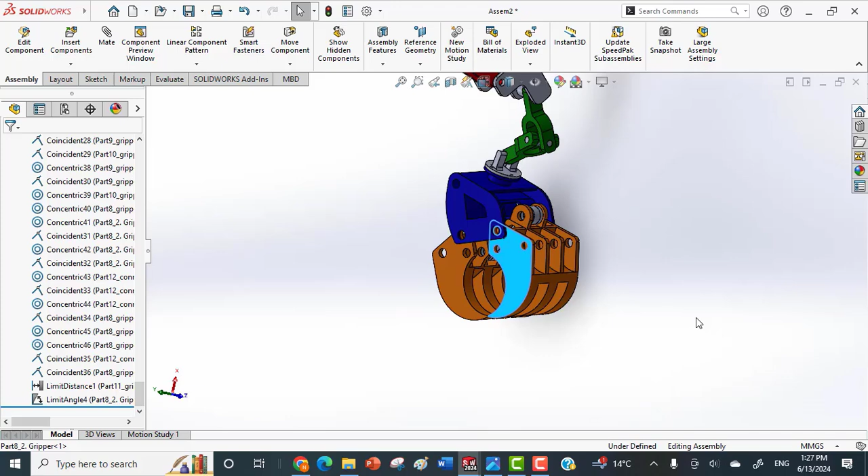Distance and angle, at the same time. It is a little sophisticated because I have used just one piston and cylinder, a couple of piston and cylinder and rod, and I will draw from the beginning. I mean, I will show you how I drew that from the scratch. And maybe I will show you how I drew this mechanism, this universal joint as well.

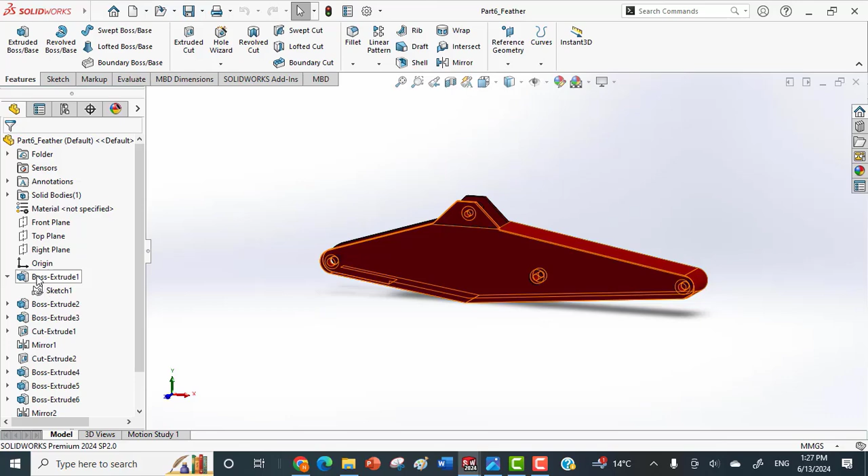Okay, the rest of them are very simple. You see, for example, here, this one, I can show that from the scratch. This is the sketch, and I have done what? I have done the main sketch. What have I done? Okay, what I have done is that I have made a boss extrude here. This one. That's it.